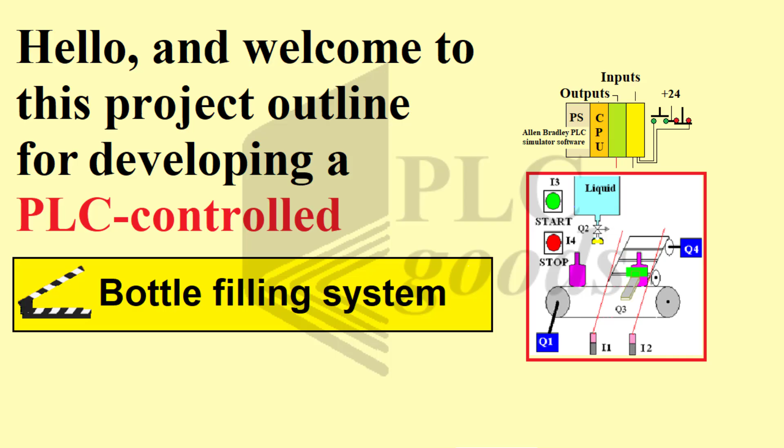Hello and welcome to this project outline for developing a PLC-controlled bottle filling system. This project shows an automatic bottling system controlled by a PLC.

Step 1. Conveyor belt operation. Empty bottles are transported on a conveyor belt powered by a motor relay Q1. When a bottle gets to the limit switch I1, the conveyor belt stops. The inlet valve Q2 is then activated for 5 seconds to load the bottle.

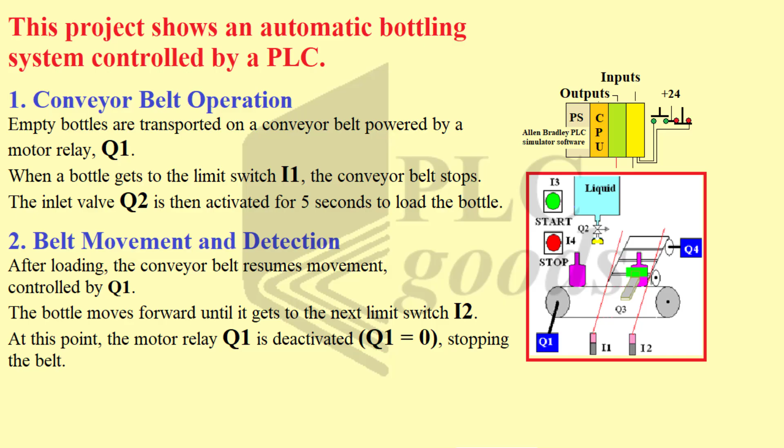Step 2. Belt movement and detection. After loading, the conveyor belt resumes movement controlled by Q1. The bottle moves forward until it gets to the next limit switch I2. At this point, the motor relay Q1 is deactivated, stopping the belt.

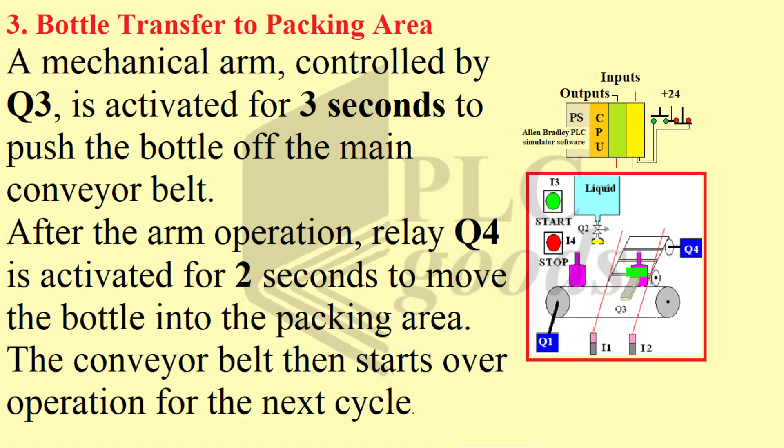Step 3. Bottle transfer to packing area. A mechanical arm controlled by Q3 is activated for 3 seconds to push the bottle off the main conveyor belt. After the arm operation, relay Q4 is activated for 2 seconds to move the bottle into the packing area. The conveyor belt then starts over operation for the next cycle.

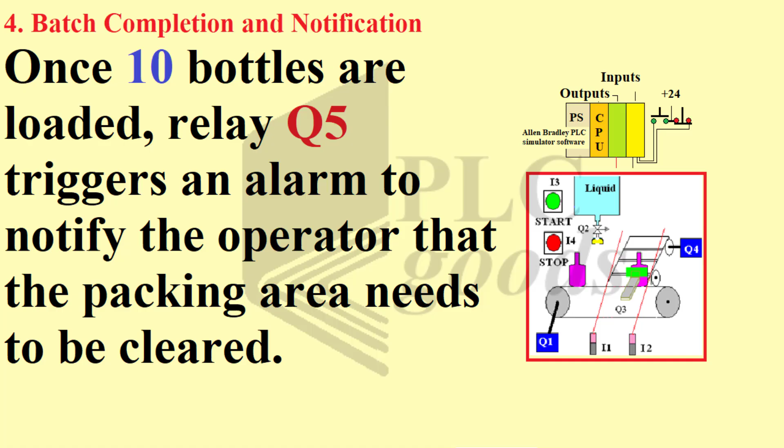Step 4. Batch completion and notification. Once 10 bottles are loaded, relay Q5 triggers an alarm to notify the operator that the packing area needs to be cleared.

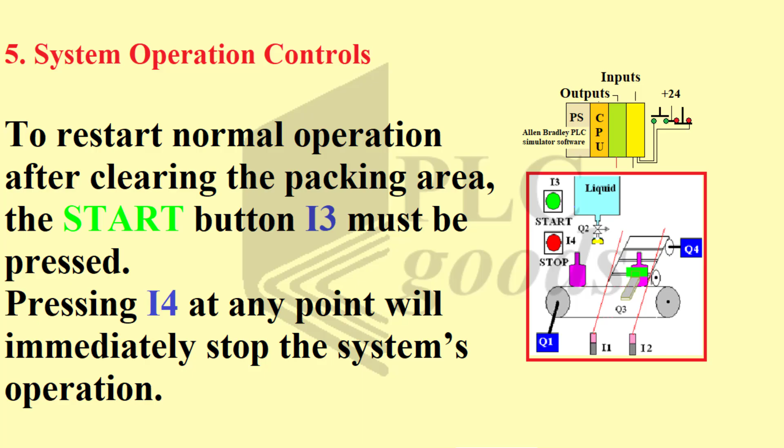Step 5. System operation controls. To restart normal operation after clearing the packing area, the start button I3 must be pressed. Pressing I4 at any point will immediately stop the system's operation.

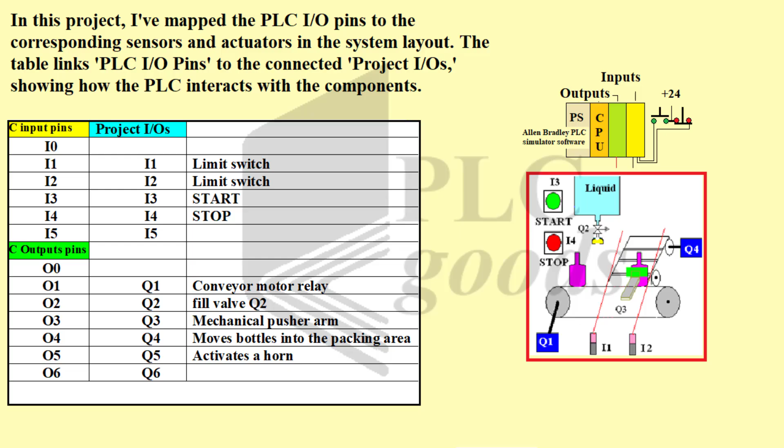In this project, I have mapped the PLC I/O pins to the related sensors and actuators in the system layout. The table links PLC I/O pins to the connected project I/Os, showing how the PLC interacts with the components.

Now let's go through the pre-written ladder relay control program for the project and see how it meets the project's requirements.

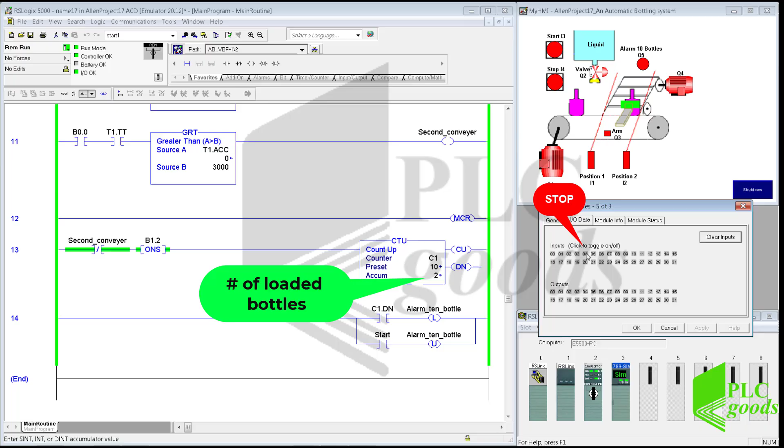The project is successfully tested on a virtual Allen Bradley PLC.